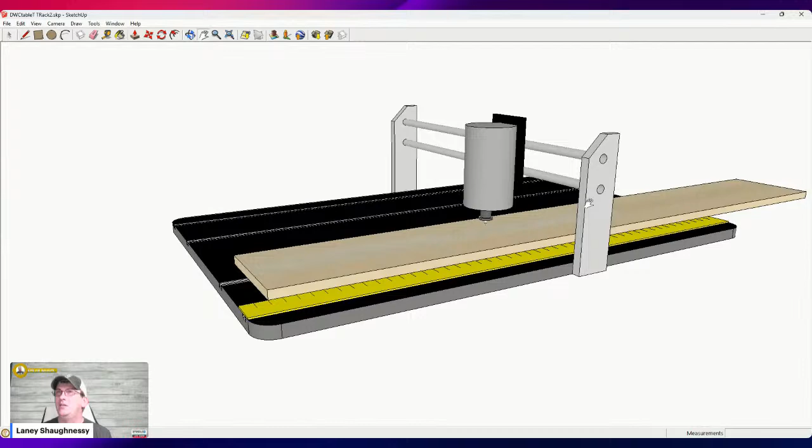Now, very roughly, I have mocked up a view of my Digital Woodcarver 2440 CNC machine, not the whole machine by any means, but just a drawing of it to talk about what I've got going on. One of the things that you'll see in the window here is this yellow, what looks to be a ruler, very roughly drawn, of course.

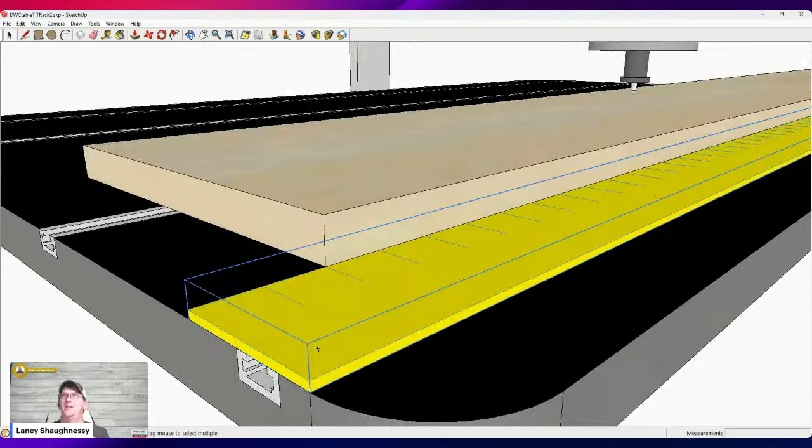But this is my favorite thing. I have no affiliation with Swanson or Johnson or any of those ruler companies. But I went down to Lowe's and purchased a 48-inch metal Swanson ruler, and now Lowe's carries Johnson. I don't think they carry Swanson anymore.

This ruler is the lifeblood of my tiling jobs. And let me just stop right for a second and acknowledge something here really quickly.

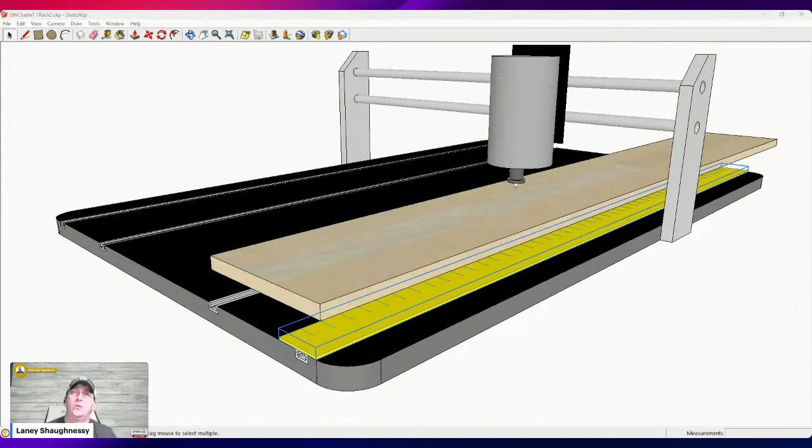And those holes are slightly larger than the 1/4-20 bolt that I use to secure it down, but everything slides right into the T-track. And what I end up doing is I'll put a pin in the router, and I will move that pin. Let me see if I can just kind of simulate this. I'm not going to try. Well, hold on a second. I can try. Let me zoom in. Let me see if I can pull this flat, because my pin is flat.

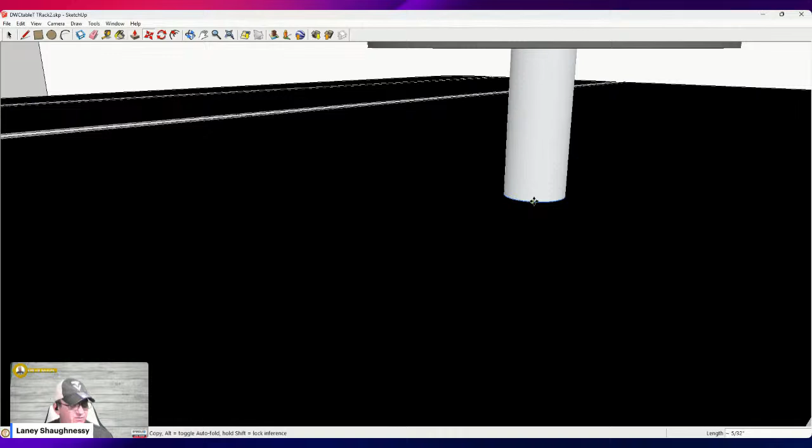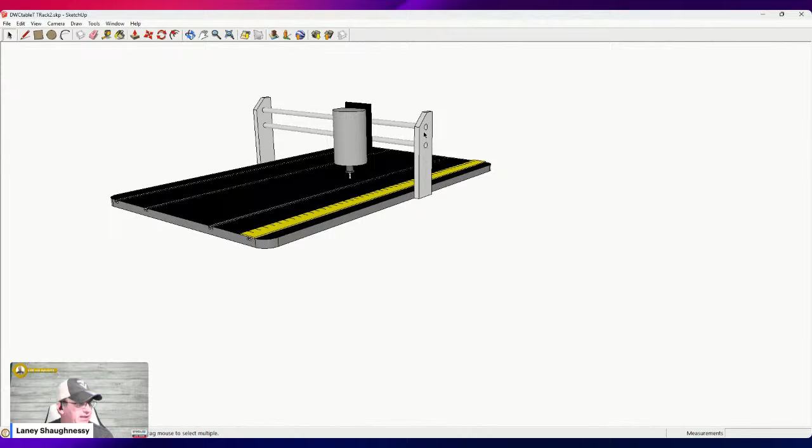And let's see. We'll just make it a little bit longer, so all of this makes sense. And what we'll do is, let me tilt out of the table here. There we go. I'm going to select this, and all of that. I'll hit G for group and create. Now I'm going to move this, and let's just move it right along here.

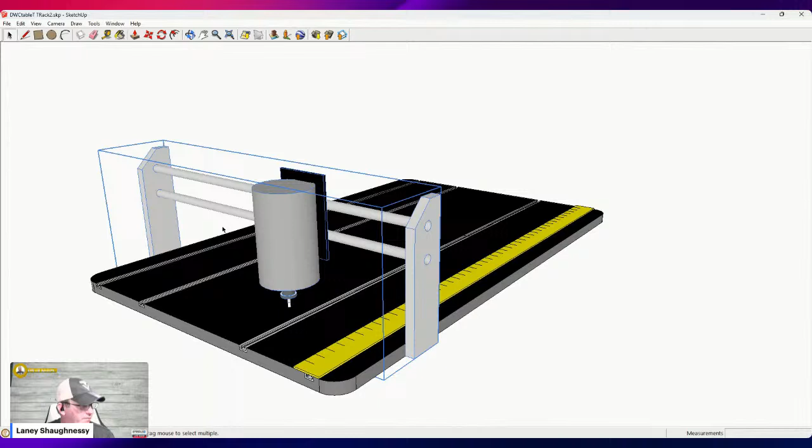And I want to try to simulate this, but I don't know if I can. Oops. Let me move this down. Oops. All right, now let me select this with it and move that over. Come on over. Kiss right there. Okay, so let me get out of that.

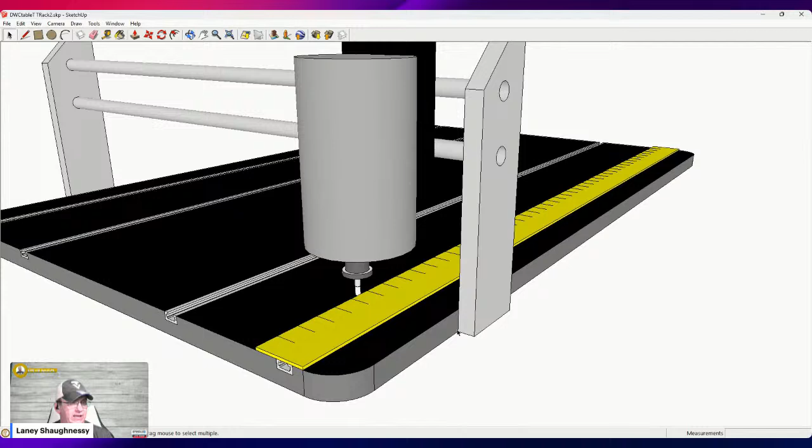So what I end up doing is the holes are slightly larger than the quarter 20 bolt that I'm using. I secure it at one end. I bring my straight pin down up against the edge, secure that end down, and then I will travel all the way down to the other end of the table, slide the ruler up against it, secure it down, and secure the middle bolt as well. And now I have a perfectly aligned fence, if you will, that's aligned with the travel of my CNC.

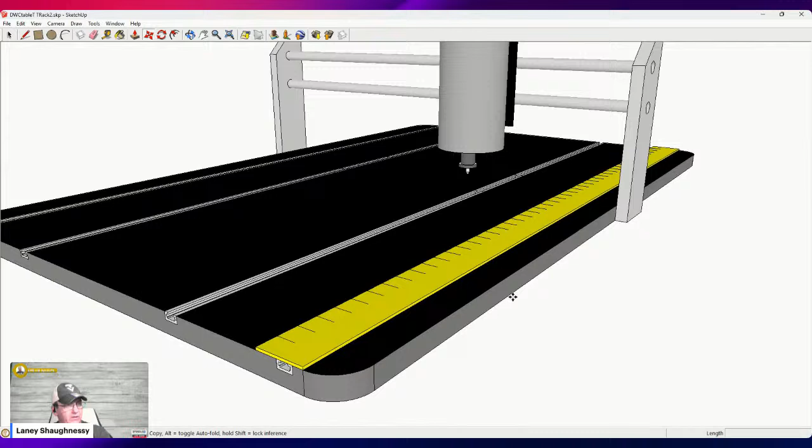And so it is, except for when I'm dragging it off the alignment, but it is aligned with the CNC, and it's ideal. So let me move this back up to here. Let me get back to this point. When I secure my material on the CNC, it's a 48-inch ruler. My table happens to be the 2440. The table is 48 inches long. So the ruler literally goes from end to end on the table. And I end up using the 2-inch mark. That's the mark that I reference the first edge of my board on.

And then on my CNC, I have a waste board that has different clamping options. So I can clamp from, let's call it the right side of the ruler, and of course the left side of the board. So I can clamp on both sides of the board to get clamping and secure all the way around.

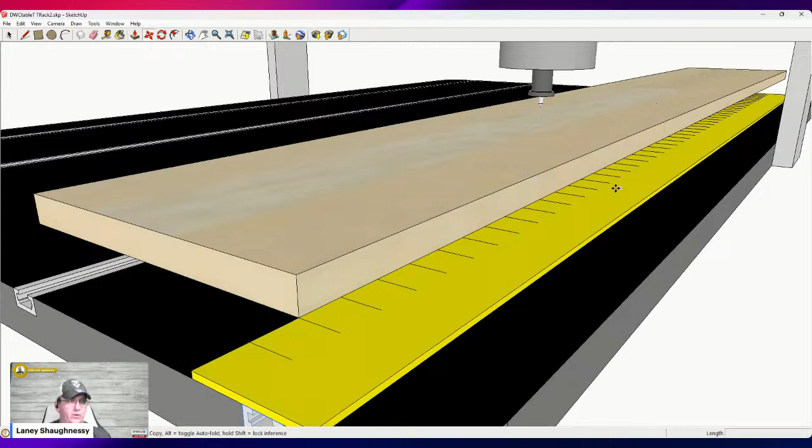And on the ruler itself, the end bolts that I have securing it down, if I need clamps for those, I have an all thread bolt with a nut on it that goes through into a nut in the T-track, right? Secures that down. And then I have a little bit of thread sticking up that I can put a small piece of wood that has a notch like a rabbet on the end of it that can hook on there, and a wing nut on top of that to secure it down, like another clamp on those 3 bolts there that are on that particular screw setup.

And so I have plenty of ways of making sure that both sides of the board are clamped evenly and everything. So that's going to be critical. So your clamping, your positioning, and things like that. Now, on my particular CNC, in this particular instance, my cutting area from the front of the machine back is 40 inches. That's my maximum travel. So from the front of the machine back 40 inches is the travel.

Now on my particular 2440, I have what's called the joint maker jig attachment, which shoves the gantry forward 3 inches, and it allows my router to come off the front of the table by 3 inches. And so by shifting the gantry forward that 3 inches, I lose that 3 inches on the back end, right? I'm moving that 40 inches out further.

So technically, in my situation on my machine, and it's all about knowing your machine, from the front of my table back 37 inches is the maximum travel I have, and then 3 inches on the front side, of course, makes 40, right? So I still have the 40 inches of travel. Nothing changes there, but I've shifted everything off the front so I can carve dovetails, finger joints, and things like that off the front of the table.

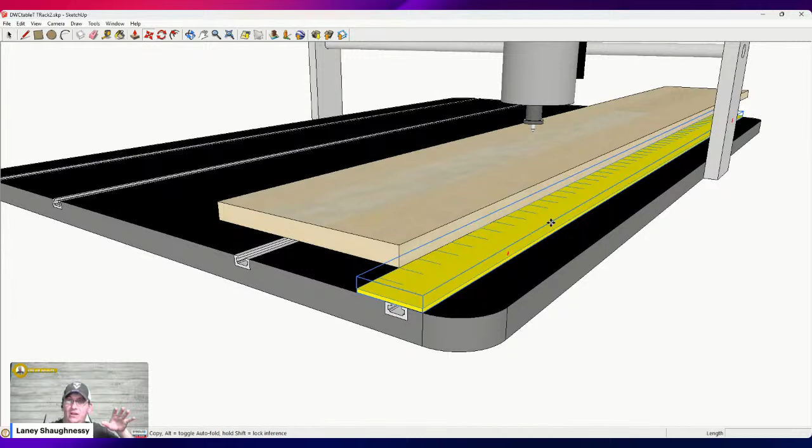So that's why, long-winded. That's why we're back here, and that's why we're not using the bigger machine. That's why we're using the 2440. And also it gives me a chance to make a video of the actual tile job, how to tile, showing the carving and all that stuff, which is going to be phenomenal for Digital Woodcarver customers to review, but also other people too. All right, so that's my setup and that's my pass through. Now let's jump over to the Vectric software and create the design, set up the tiles, and go from there.

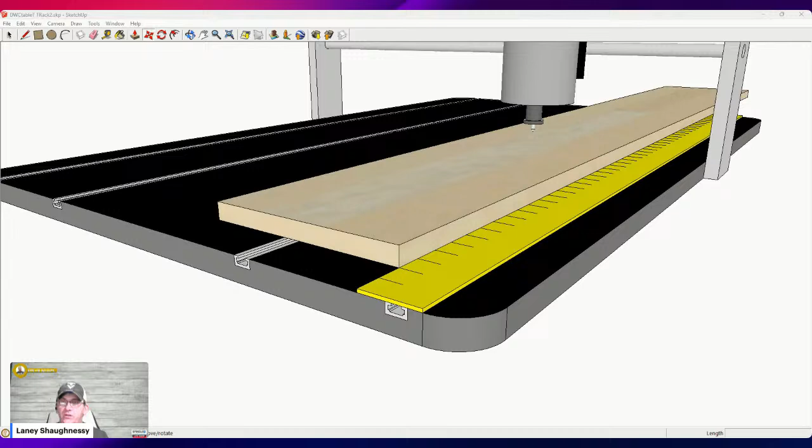One of the main reasons, Keith, and I know you, you are a dog guy, so I think you will appreciate this very much. Let me see where we are here. We're getting ready to switch over to Vectric, but before I do, let me share another screen with you all. Same screen, but now I can open up images. Let's see if I can get both of these to open up on this computer in different positions.

So, ladies and gentlemen, I'd like to introduce you to Lainey, spelled differently, Laynie. Lainey is a new member of the family, and we were getting acquainted with her yesterday, and it kind of took me away from class. She's got some husky in her. She's a bit of a mixed breed, big old girl. I'll know more about her genealogy in the upcoming weeks as I take her to my vet, and we'll do a little 23andMe for dogs, see what all she's made up of. Beautiful big old dog. Keith, I know you're a dog guy, so I'm sure you can understand. That's what took me away from class yesterday.

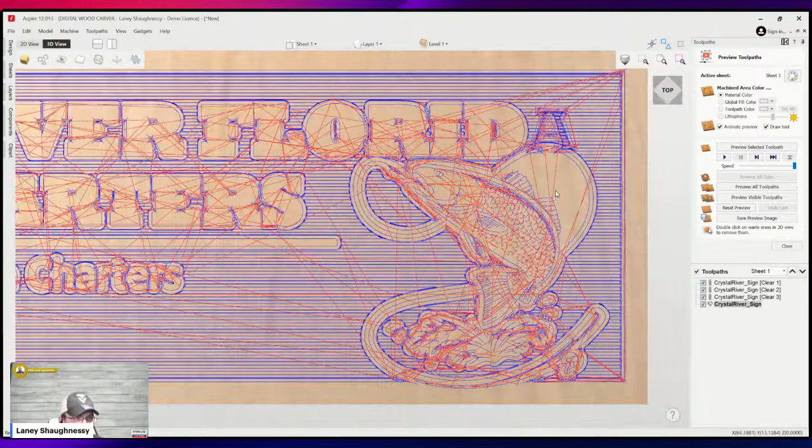So just in this visual, and I know it's hard to see with all the reds and blues, but number one, the overlap, the outside of the A is not really getting carved. You can see the difference between the A and the D because of that overlap. But also I can see all the wood right here is not getting milled away. That's got to go because the fishing line is just going to be a single line, and that's all going to be background. The background is 3/16 inch back. So we got to get a line in there, and then we'll have to fix up the border here.

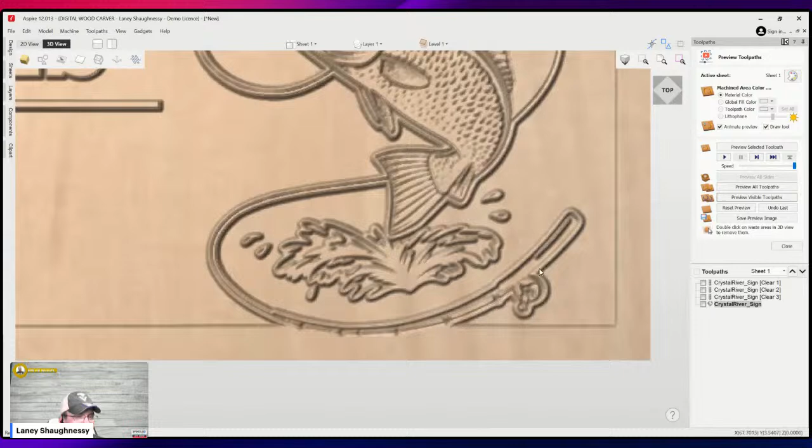Let's just preview it now, knowing that it's wrong, right? All right, so we know about the A. The A didn't carve, but first thing I can see is my resolution quality is really low.

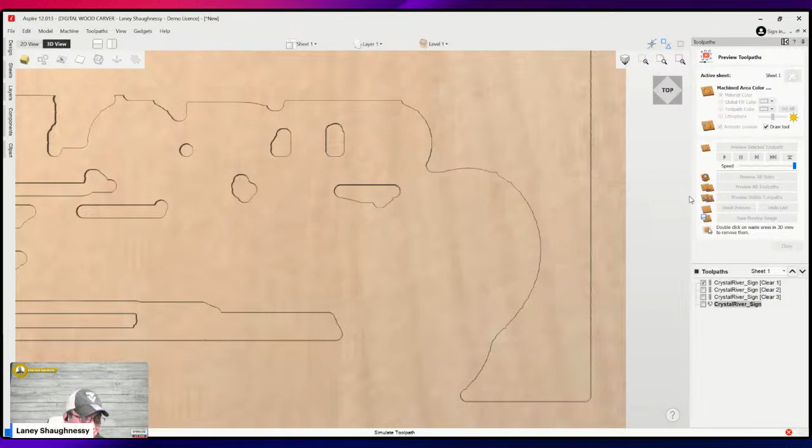So I'm going to go to my toolpath preview simulation quality, and I'm going to turn that up to maximum. We're going to preview that again. It was really pixelated. I couldn't see what was what. So we're going to be maximum resolution.

Love this new computer. No slowdowns.

Last week, man, I was so mad. The stream, I had the new... was it last week or the week before, ladies and gentlemen, that were following along with me? Just got the new computer set up, everything was going great, and then the stream canceled halfway through. Then in a private class, it did it again, and I thought, oh no. It's not that it cut out like it wasn't streaming, it was streaming, it was cruising along. So I thought, well, my relationship with StreamYard is about to be over, and it is.

It's over. Okay, so here's what I'm seeing. For the Fishing Charter Professional, that's all normal. That's exactly what I want.

It's going to be raised and stuff. I had talked to them about adding a texture in the background, like a chunky kind of texture using a ball nose bit, but it would have taken forever on this machine. I can't penalize them for that as far as billing, but it was going to take it a little bit out of range, and they're okay with no texture in the background. Because I told them, I could make the texture look like water where the fish is jumping out, with a little splash, or make it look like a windy day on the Gulf. I can really do it up nice. But they said, nah, we want the sign, but we don't want to spend too much on it.

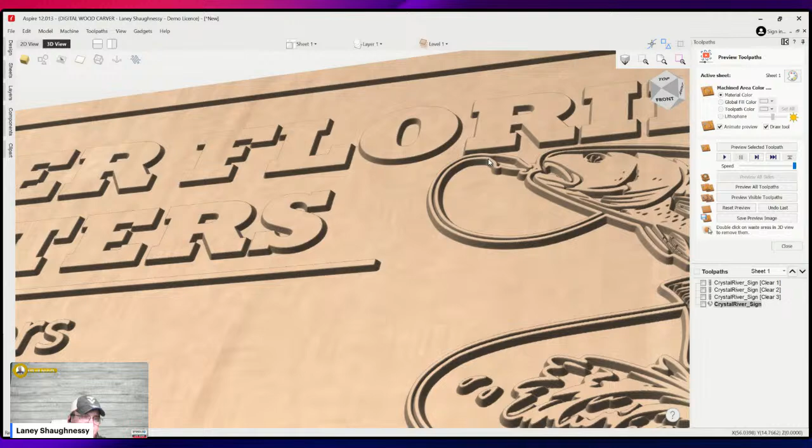I'm doing a raised design and I have to do this offset that creates kind of an island, right, that everything gets carved on. Since there's an island there, let me turn this on its side here - think of a platform. So this is a platform, and then the string, or the fishing line, is getting carved in that platform, right? Well, in this particular situation, since the line is... I kind of want the platform right here to be the line, is what I'm trying to say. I want the platform to be the line.

I don't want there to be a V carve in the middle of it, and I want the lure to be solid as well too. So all I have to do, from looking at this, is remove the vector in the middle that kind of represents the line and just have the offset that was created carve that line through.

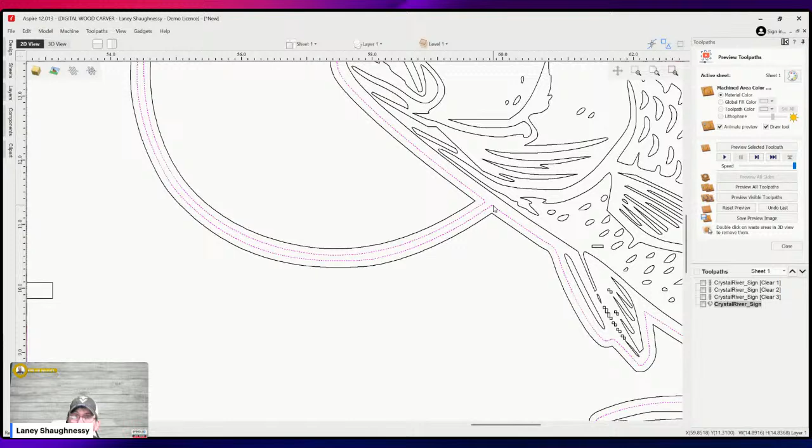So when we look at the 2D view, this vector right here in the middle doesn't need to be selected, but it is cut off here. So I need to connect this vector from here to here to close that off, and then close off kind of a line. And then I can not select that.

Same thing in here, this single line needs to, I just need to carve around in here and in here. The reason why this looks like a single line instead of a double line is because that's the double line, that's the other line. I'm missing that inside line on the around the fin, and that's why it's solid here and not milled away.

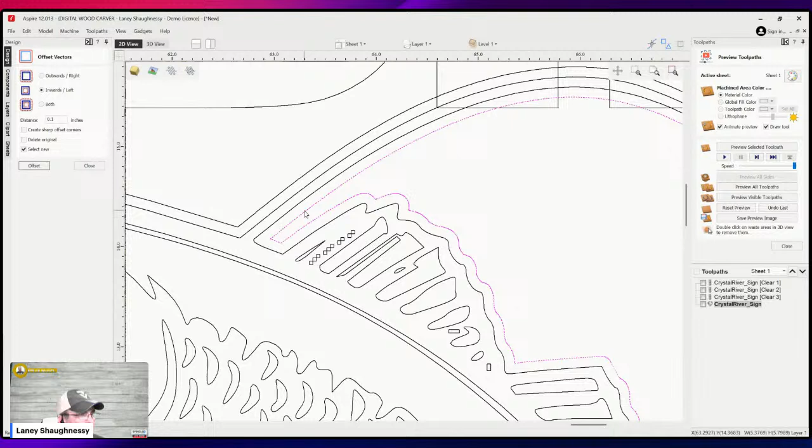And then when I'm carving it all, we're going to be selecting this and this. That's going to, this whole big white area, that's going to represent the line. These two lines are going to go away. So at the fish right here, it needs to connect there as well, and that line needs to be kind of a separate thing.

Let me just verify that two lines go all the way around. Two lines. And then I need to cut it off right here. This rod is going to stay like it is. So here, kind of where the rod ends and the line starts, I'll end up connecting this and I'll have a separation. All right, so let's do that so it makes sense of what I'm saying.

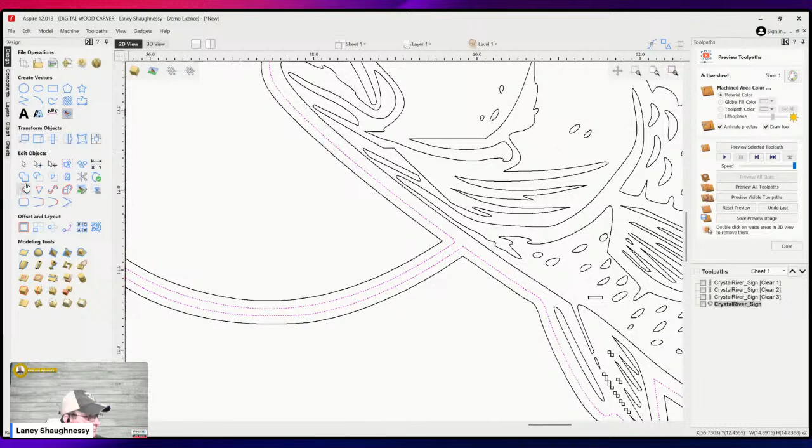So in node editing, we're going to go to node editing. And here, I'm going to cut the vector here and here. I'm going to go ahead and delete this span that's right here, and delete that span right there.

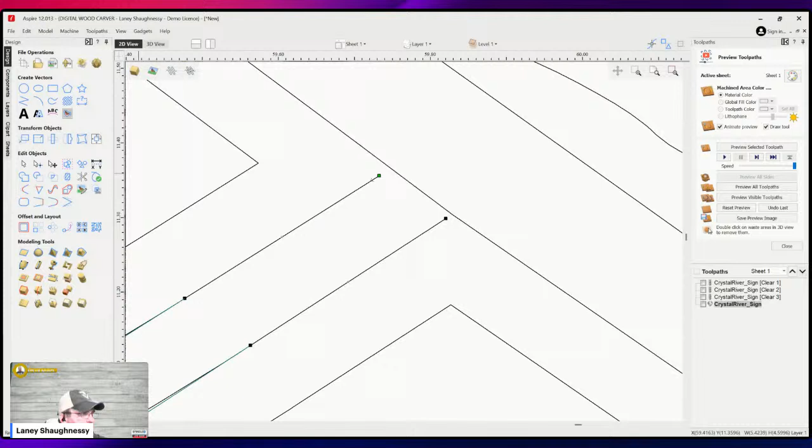And on this node, I'm going to kind of pull it back a little bit, not much, just a little. I'll pull this up a little. All right, these two points are going to connect with a straight line. So join with a straight line to close that back off. And then I'm going to do the same thing here, join with a straight line to close that off.

Now, I want to kind of somewhat create that. It's going to be insignificant in everything, but I don't want too big of a gap. All right, so now here when I'm carving this, I won't delete it right now, but we're not going to have that selected. So that's going to be turned off.

Okay, now we're going to come up here. Same thing, node editing. We're going to come here, and I'll do it back here because I'm going to end up just getting rid of this curve. But let's go right about here. Cut the vector there. And on this kind of, let's call it a corner, cut the vector.

I'm going to delete this span right here, and I'm going to delete this span and this span.

Okay, now these two vectors, it is technically kind of a little bit of a curve. It doesn't, versus a straight line, but it's such a small area I could almost join with a straight line. But this vector and this vector here, these two are going to join with a straight line. And then let me actually pull this up just a little bit. And then these two will join in a straight line.

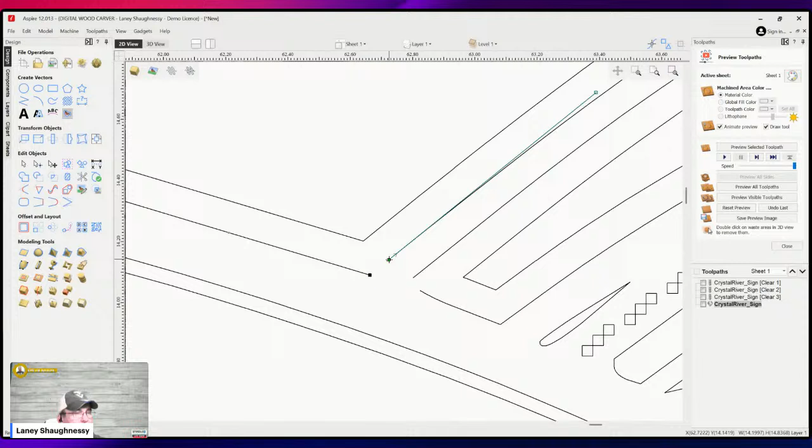Now, notice when I select this, if I try to include this in it, let's say, and select this, if I hit join with a straight line, all it's going to do is try to find—I don't know this for sure, but it finds the closest point of intersection.

And so for me, that's good. I would say that if I rotated this 90 degrees, this is actually the shorter point, so finding that point from there to there is perfect for me. I'm happy with that. I don't know what makes the algorithm do that, why it chose to close off here versus this way, but I'm glad it did because that's what I want it to do. So when I hit join with a straight line, in this case, it's not going to be straight.

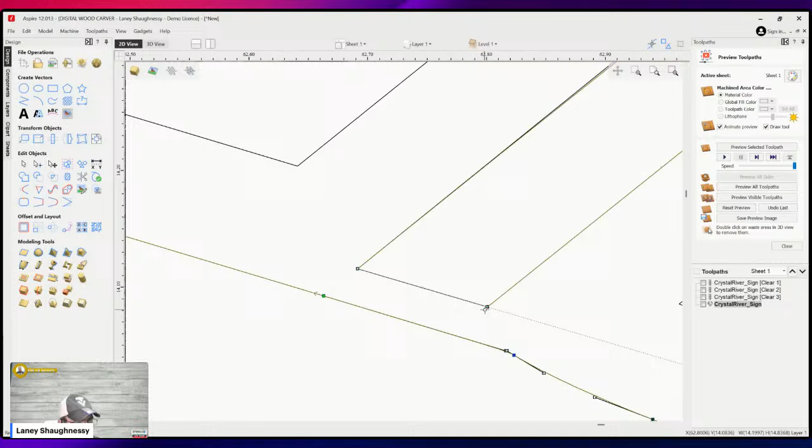I'm going to do a smooth curve. That's going to kind of connect that together with a little bit of a curve there. Now on this, I want the line to somewhat follow the curve, so I'm going to take this guy and kind of bring him down, to kind of create almost a consistent width, if you will.

Now I got to go all the way over to the end of the rainbow here to this side. Same scenario, cut the vector. Now, by the way, the whole point I was making about the short distances - if I would have said join with a straight line, it would have connected the two obvious points that were coming down, and not the ones that it did, which again was good for me. Join would not have been the option I would have chose. I would have simply just drawn a line from point A to point B to connect them together. That was the ending of that whole point.

Okay, so in node editing, I believe I cut that vector already. Let me see if I did. I did, yep. So I'm going to pull this back and pull that back. Now, join with a straight line. Oops, that was a smooth curve, sorry. Join with a straight line.

And then I'm going to take this and join with a smooth curve, and I'm going to fix the curve a little bit, so it doesn't need to be so dramatic on the curve. Just a nice flow there, and somewhat decent space there. So I'm kind of good with that. It's so insignificant.

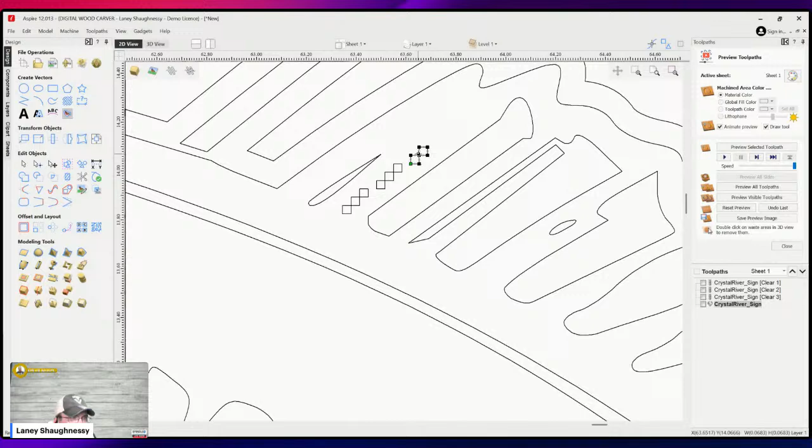These figure eights, by the way, this is trash. This is the noise filter. So had I turned the noise filter up a little bit, these figure eights would not be here. These are the problem children - when the software says you've got some overlaps and intersections, that's this. So this is pixels, overlapping pixels, trash. And if you have a square pixel, in my opinion 99.5% of the time it's trash also. Your design has contour and shape and curves to it, and if we're coming through here right in the middle of these nice contours and curves and we have this square pixel, that's trash.

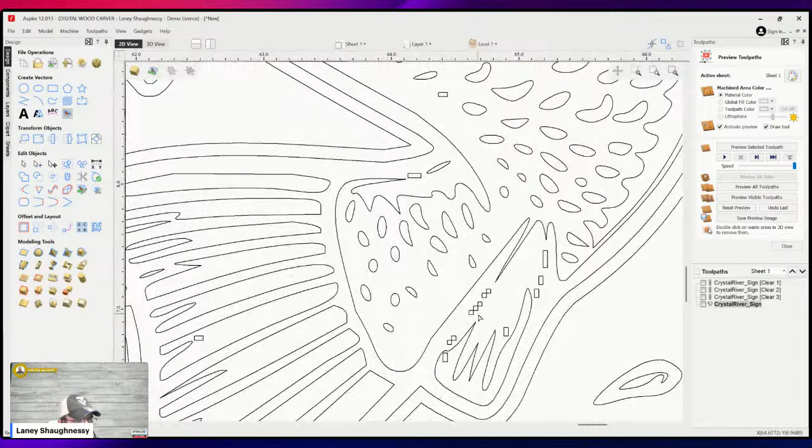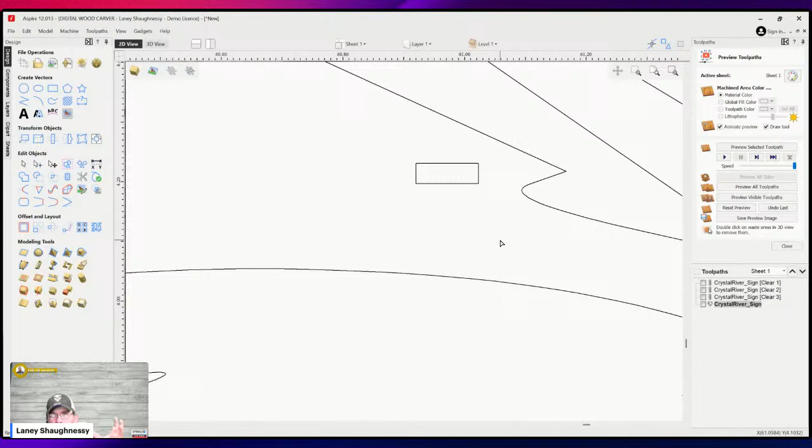Get rid of it - my opinion, that's what I would recommend. So here, figure eights, I call them figure eights, but gone. All these square pixels, gone. So come here, figure eight and square pixel, gone. That kind of thing, the square pixel right there, that's trash. Now, had I turned my noise filter up when I traced the image, it would have ignored all of that. See, odd man out - I got this water splash, and all of a sudden there's just a square pixel right in the middle of it, it's trash. Get rid of it.

But had I turned my noise filter up, it would have ignored most of that. So we're going to get rid of this and these figure eights here. Okay, all right, I am good with that. Everything looks shapely. Okay, so I've isolated this.

Oh, let me get out of node edit mode. I've isolated that vector, I've isolated that vector. They're not going to be selected in my next toolpath simulation here. All right, so done and done. Now I need this one right here.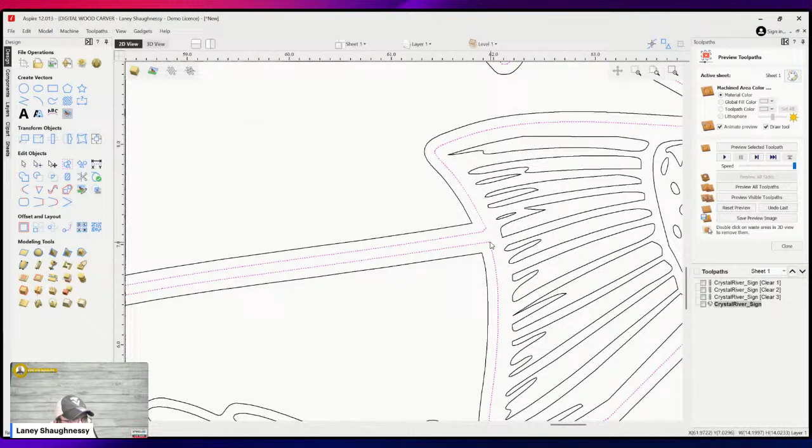So come over here to the tail, rinse and repeat, node editing, cut the vector. I'm going to come back here and cut the vector here. Actually, I'm going to back up a little bit right there and cut the vector. I'm going to delete this span there and there.

I'm going to delete that span. Okay. Join with a straight line to close that off. I'm going to actually pull this one back just a little bit. And then join with, and again, it could be a straight line, it's such a short area, but I'll just do a smooth curve. Join with a smooth curve. So it'll just create kind of an organic curve a little bit there.

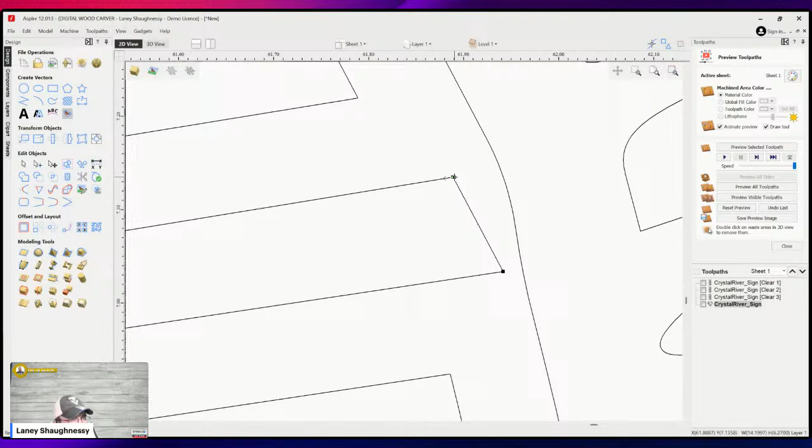Okay, on that tail. All right, again, don't want a big gap right here. Let me pull this out, try to stay consistent with my thought process and everything. All right, now, right here, I just want that fishing line to stop here. Kind of at the end of this pole, let's call that the end of the pole right there.

The line again, for me, is gonna be this wide area right here, that island and everything, because it's such a big sign. That's what I want. It's what I want, right? So it should be what the customer wants, but I think this will look better. I could be wrong. All right, let's cut the vector there, and let's cut it here.

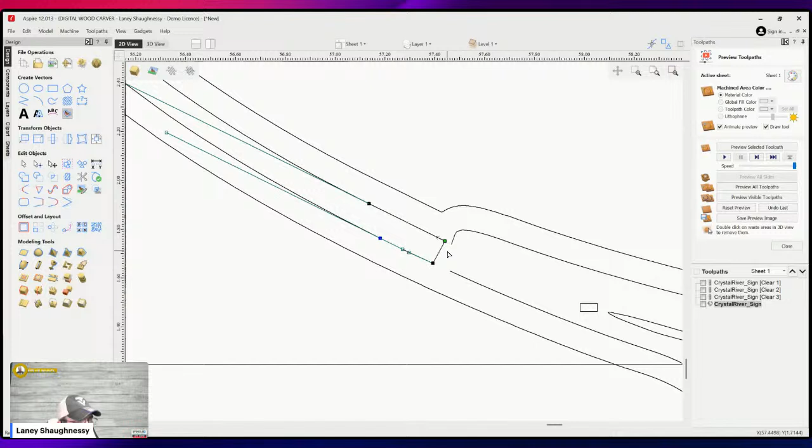Okay, now I'm going to pull this back just a little bit right here and here. I'm going to join that with a straight line, and then I'm also going to join this with a smooth curve. Okay, close that off. There's another stray pixel hiding right there. Delete, and there's one. These three, that's kind of representing the, it's like a little shadow on the pole.

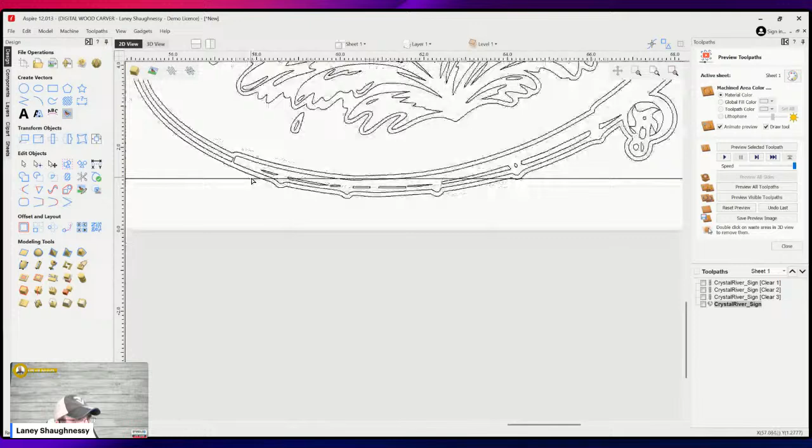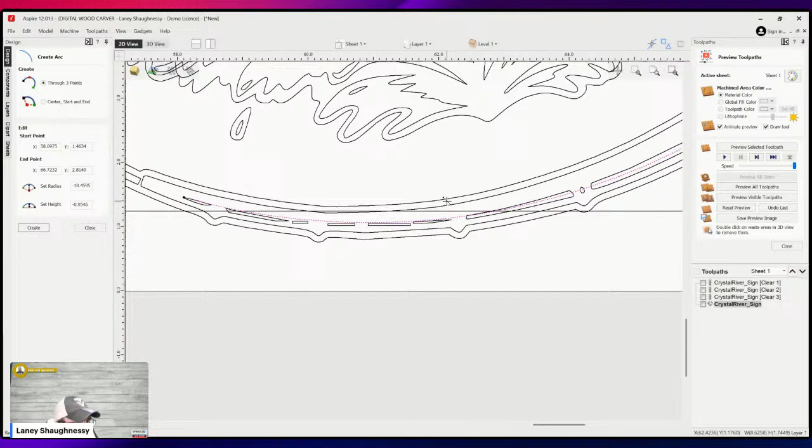I am going to, let me see what that looks like in the carve here. Okay, I'm going to redraw that really quickly. So what am I going to use? Let's go with an arc tool, draw an arc. I'll pick right here, point A. I'll pick up here, point B. And let's pull that arc somewhere right about here. It's not really an arc. It's more of a Bezier curve.

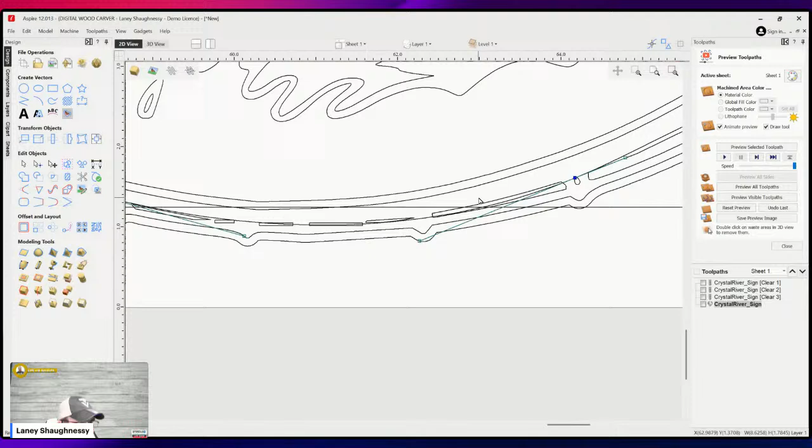So let's go to node editing and let's make that a Bezier curve. Okay, so I'm going to insert a point right here, and let's pull this down. Pull that down to there. I'm going to pull this down to here.

Okay, now I'm going to hold down the control key, and I'm going to drag a copy of this up to here. Go back into node editing on this, and I'm going to insert a point right here and kind of pull that up to there. Get that to flow kind of like that.

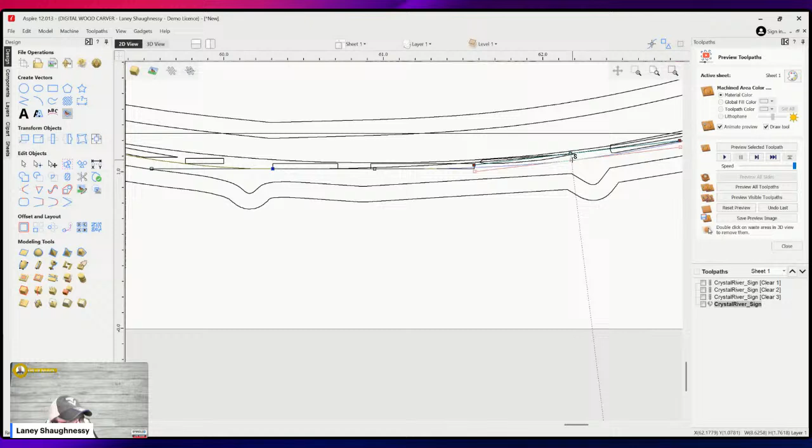It's hard to see with all those other vectors behind it and everything. Don't worry, it'll make sense in 2 minutes. Insert a point here so I can pull this up. Pull this up to here, and then pull that up to there.

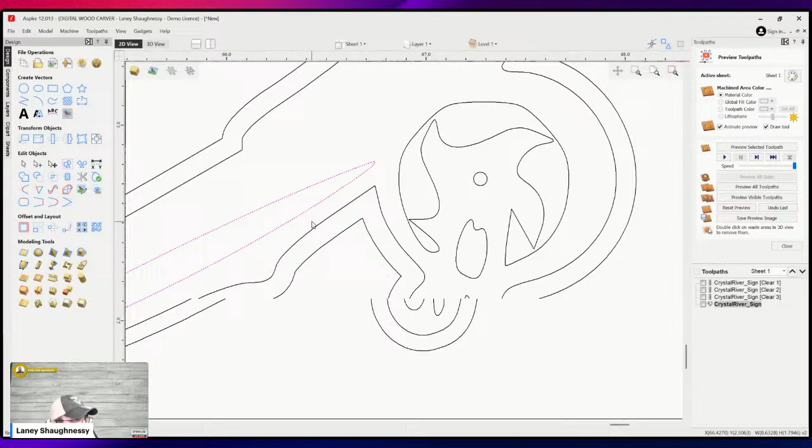All right, now I'm going to get out of node editing mode, and I'm going to get rid of all the vectors in between those two lines. Select and delete. Select and delete. Select and delete. And then I'm going to join with a smooth curve on this end and that end. And that's going to kind of replace that, so it'll be kind of a solid instead of those little ones in there. That, again, it is what it is.

All right. So now, again, need to get the A done. And so now I can come in and I can kind of connect things together. So trim with the scissors. First of all, yep, convert to curves. Okay. Trim with the scissors. Line's going to come in, connects here. Let me just

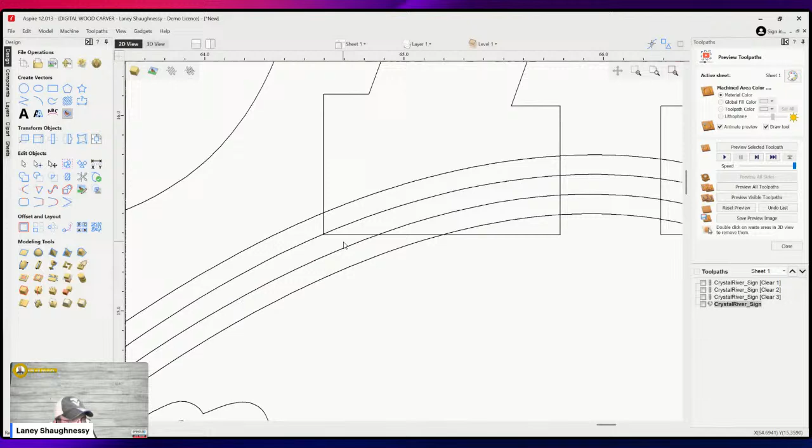This line is not going to be part of the drawing. I don't want to delete it. I want you to kind of see with and without. But I want it to be clear in here what I'm trimming and stuff. So I'm going to move this out of the way. I will put it back in just a minute, but I want you to see what's happening here.

So with the scissors, we are basically going to connect this here. The line is kind of going behind the A, if you will. And then here, we're going to have it go in front of there.

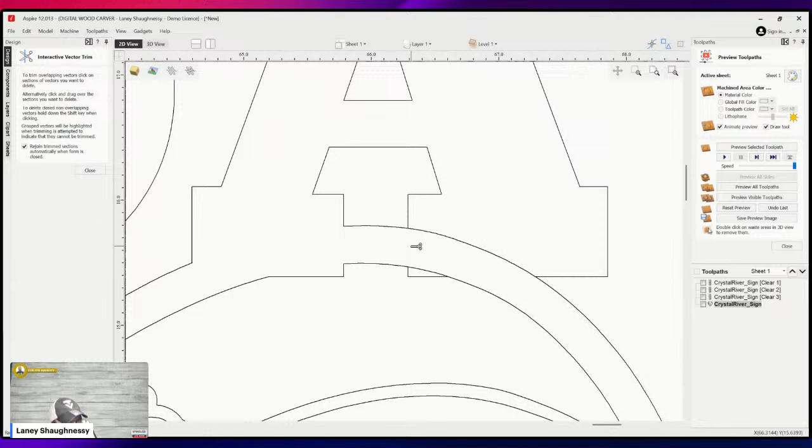And in order for that to happen, I need, it's not gonna, yeah, it's gonna go behind. Let me see here. Hold on a second. I need another vector.

A is going to get raised. The line is going to get raised. Yeah, we'll have it where it looks like it goes behind for now. I'll let them make the decision what they want. If they want it to look like it's going in front of the A, then all I have to do is create an offset and trim it so that it looks like the line is in front of the A.

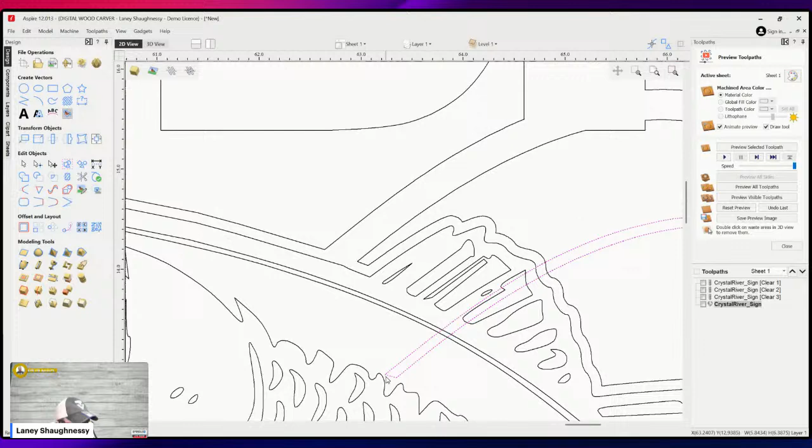We'll just do it like that for right now. All right, let's put this back. Okay. Now, again, this vector is not getting used, but I don't want to take it out because I want to kind of show you what that was versus what it's going to be now. All right, let's go ahead and go back and select everything. Again, I have not done any trimming on the pole and the border down here. I haven't done any of that.

Let's go back into the toolpath here. Calculate that. Still says I have overlap lines. That's because of the fishing pole and the border at the bottom. I'm going to continue anyway. I know this. I know that. All right. We can see our A is back, right? So let's reset the preview. Preview the visible. Oh, wait.

Hold on. No. Got to deselect. All that trimming that I just did, I got to deselect that, and that. There we go. Now let's calculate. Okay. Now let's calculate.

I got to sit up taller in my chair. That way I'm not hiding behind my name where it says Laney Shaughnessy, it was cutting my head off.

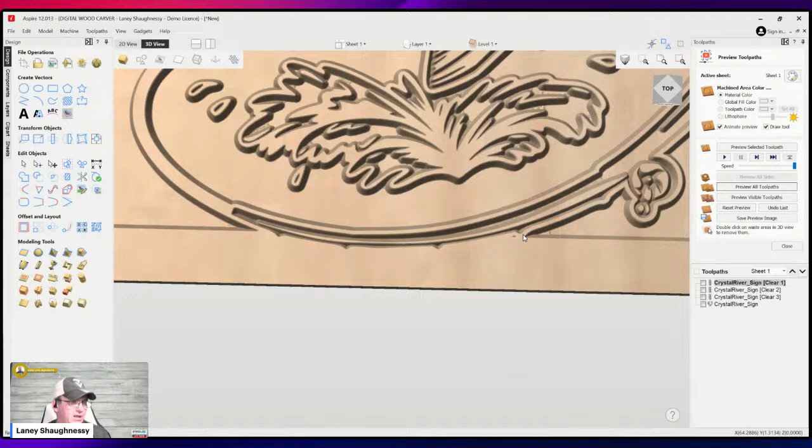Let's get this on here. All right, so on here, I need a little bit of definition for the pole where it goes into the border there. Got to fix that. And let's probably put a little detail in the lure, right?

And you know, the black line, that little thin line in the middle was kind of defining the thin line and all, but I want the fishing line to be here. The only thing that throws it off from what I can see is the width of the offset, which I can fix very easily. The offset is too fat. You know what I mean? And so it's making that line that's going through look real bulky.

Simple enough to do a smaller offset to create that thinner line in there. But maybe a little detail in the lure, you know, little fish detail, a little eyeball or whatever would probably look better. I think they'll call me out on that. I think they'll say, yeah, let's do a little detail in there.

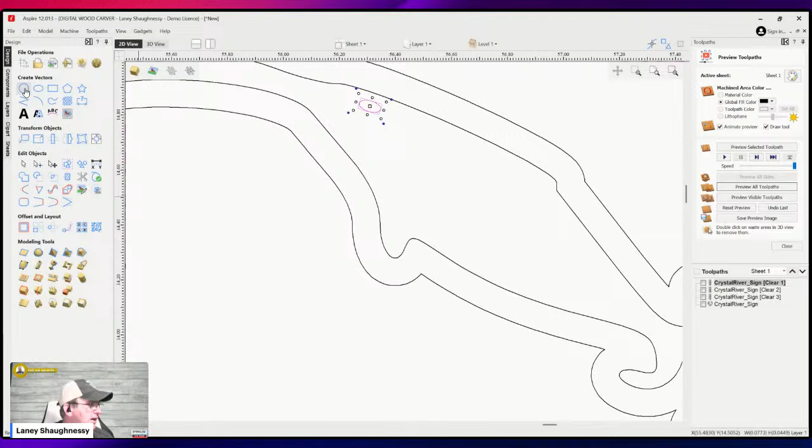All right, so on the fish, I'm not the greatest drawer in the world, but somewhere in this vicinity, I'll just kind of use this. Rotate. Let's go to node editing. Close this tool. Node editing.

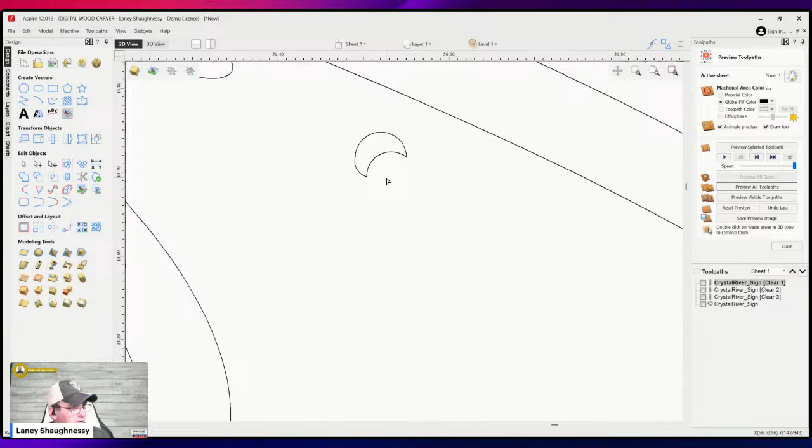All right, now I'm going to draw a line. I'm going to just kind of freehand this. Okay. I'm going to copy the vector, that little shape, along the lines.

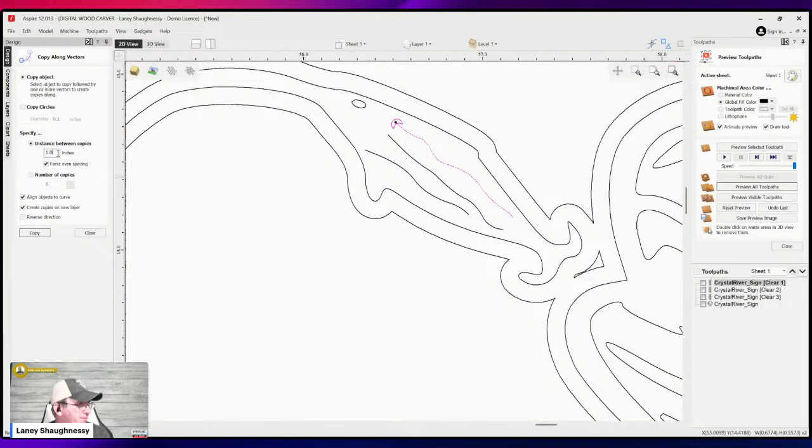Let's see here. Let's get it to go a little bit bigger on the spacing, 0.06.

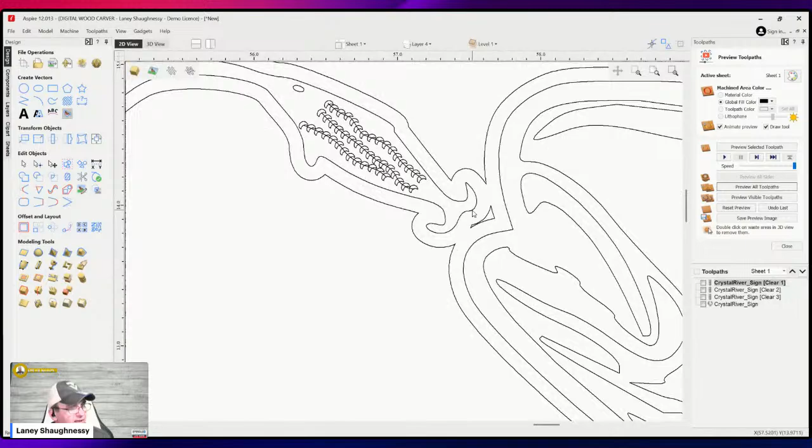Probably could have drawn my lines better, but let's see what that looks like. I'm not the greatest at that. I could have went the other way with my little scales. They went the other way. They're backwards. My fish has got scales facing the wrong way.

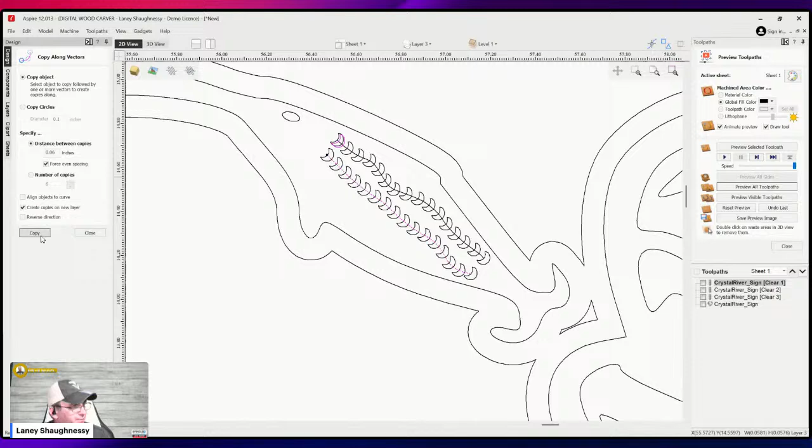I'm just going to go 2 rows instead of 3, but let me rotate this bad boy around. Okay, let's do that one more time. Select the object, hold down the shift key, select that, copy along. We're going to not align to the curve. We'll go 0.06. There we go. Turn that object off, turn this object on, copy. And then we can delete that one, the original.

All right, so we'll leave that kind of like that. We'll see what that does. I think it should flow the body. It doesn't flow with the body very well. I should probably pay attention to what it's doing, but it should flow more of a curve up and down. So anyway, we'll play with that.

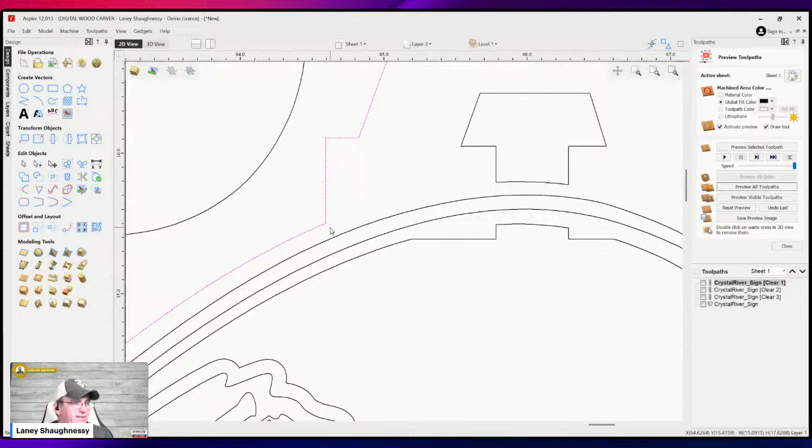But now the most important thing is on here, this line that goes all the way around. This is the offset, right? My A is connected to it, right? So I need to node edit, and I need to cut the vector right here on the A. And here on this offset coming inward, my A is connected to it as well. So I need to cut the vector here on that A and here. Okay.

Because those lines are about to get deleted. So I'm going to get rid of that, and I'm going to get rid of this, and I got this right here. I need to cut the vector. Zoom in. Oops. Cutting the vector is separating that, so I can come in here and delete this offset. This is the offset I created. That's the 0.1 offset all the way around, right? And it made everything just too big.

Okay, so going right back to here. Now, the big difference is, let me get rid of this one too. All right, so this is kind of the original. This is the string line and all. And the thing of it is, hey, I want a thin line. Why not use the original line here, right? I've already cut it from here. So really, all I need is just the offset around the fish, so it carves proper. I need that extra offset around the fish.

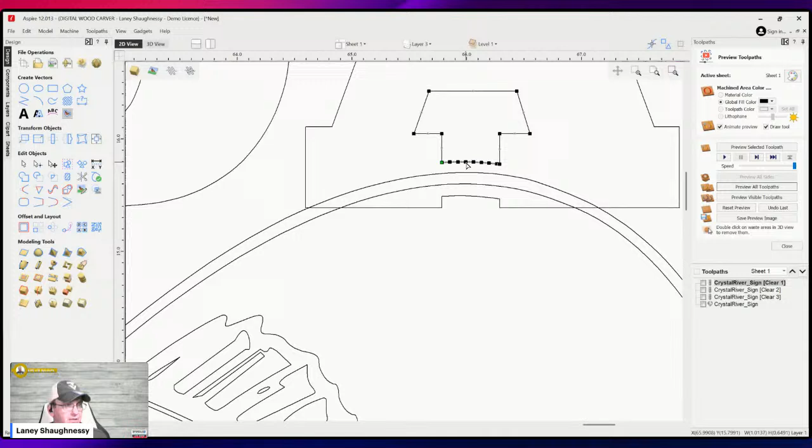Now right here, node editing, I need to cut the vector here and here, on this corner and on this corner. Get rid of these two Humpty Dumps, those curves. That was the offsets from before. Don't want that. So again, I'm going to use the extend tool to extend this line to here, and the extend tool to extend this line to here.

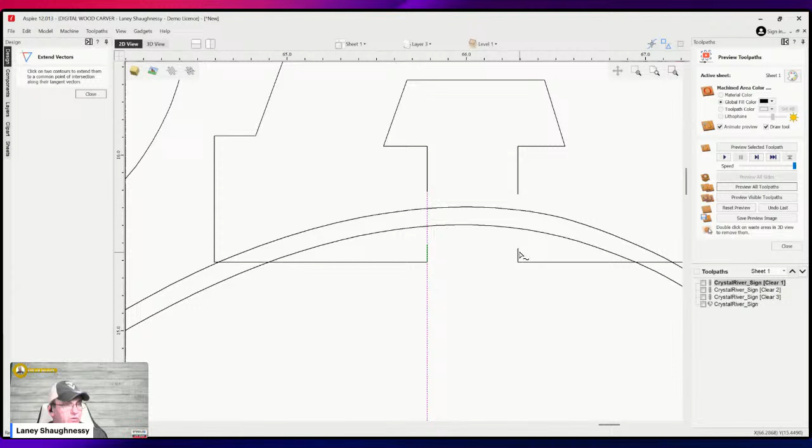But I can't really extend right now, because if we zoomed in really close, there is a little bitty notch on this line, unless that's a glitch in my eyes. Looks like there's a little notch right there, but there's not. There's no notch there.

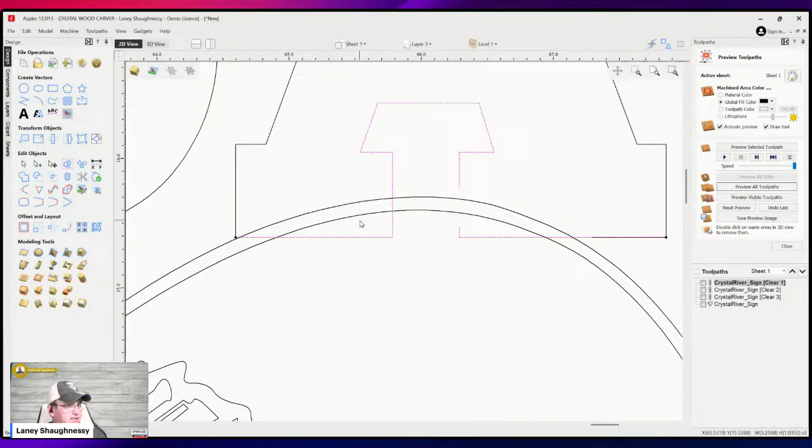Okay, those lines are not joining together. So what I'm going to do is select this, join with a straight line, select this, join with a straight line. Okay, so got the A back. So all I need to do is select this, offset it. I'm still going to need to create the offset in here. Or actually, no, I won't. Let me stop talking on my butt. Offset outward, and we're going to go just a small amount.

Perfect. Okay, now hang with me for a second. That offset is necessary so that my scales and everything on the fish carve proper. Without it, let me show you what happens. So if I selected all of this and I turn off that offset and I calculate this toolpath, let me just do this. Turn off that offset on the fish.

If I calculate this toolpath, again, we're overlapping the border down below. That's where my problems are. And I still have 4 open vectors. I got to close those. Let me hit cancel real quick. Select all open vectors. It's just the A. I need to go into the join tool and join them up.

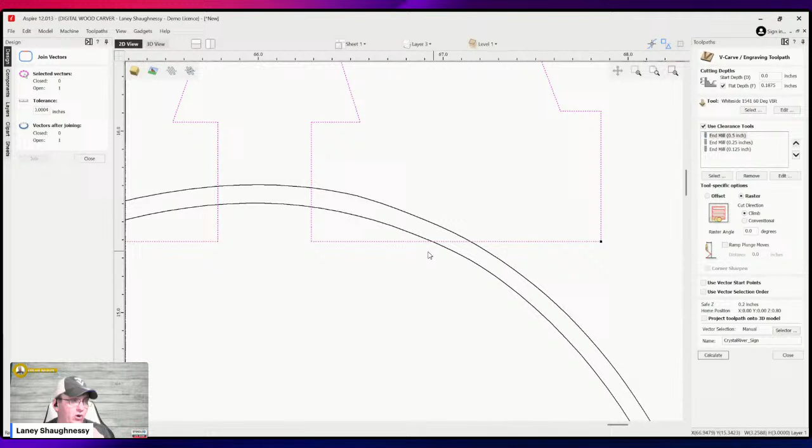Okay. When I have a vector that says it's open, right? I got one open vector. It's not closed, even though it looks closed. The quickest and simplest way to find that, there's an overlap in this situation, right? That's what the problem is. It's an overlap. The quickest and simplest way to find the overlap is it's always going to be near the

green start point. So go to node editing, find the green node, zoom in, and you'll see that the line right here, if I move this off the green node, that's that overlap, right? And so technically the overlap is actually this line right here. So that's my green node. My green node, the start point and the end point, they didn't line up together. So all I'm going to do is pull this back here and line that up with that. And then let's go back here, go to the join tool, and it should be closed, right?

Okay. So the green node always represents the start point. The black node after it, all the way around, represents the end point. If we have one open vector, that means that the start point and the end point are either gapped or they're overlapped or something along there. It's at the green node. So always look for your green node in node editing, and you'll be able to find your issues quickly.

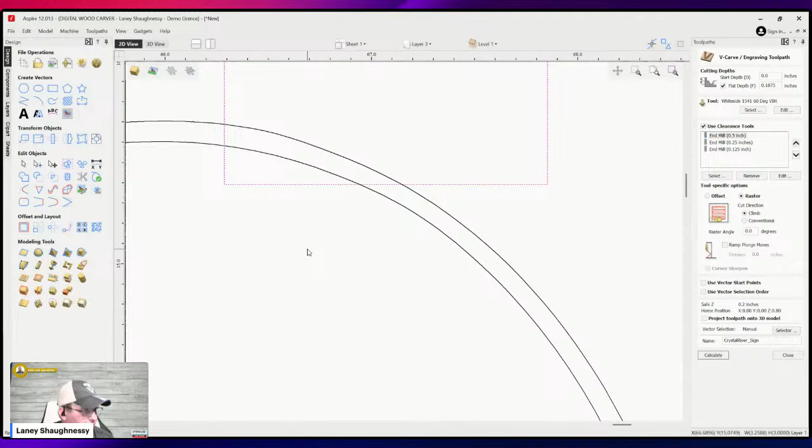Okay, so A is cleaned up. Let me show you. Let's go back to what I was doing really quickly. Turn this off, this offset. And let me show you what that would look like without that offset around it, right? So there's still 2 open vectors. That's the 2 where the scales are, the 2 lines in the little fish right there. They're being ignored. But watch this.

When I reset this and preview this, the fish is going to be reversed from what it should be. It's going to be inverted: everything that was once carved down is going to be raised up, and everything that's raised up is going to be carved down because that offset is not there, right? So as we go through and preview this, the fish here is reversed. The scales are raised up, and the body and gill and all that stuff is carved down when it should be the other way.

And my little detail in the little lure there doesn't look too bad, but it's not too great either. I'll spend some time on that one. But that fish there is inverted, right? So everything else looks great. The single line, perfect choice, all that stuff looks wonderful, much thinner, better looking, improved, but the fish is backwards. So I need that extra line, that offset. Let's go back in. Now, in order to use the offset, my little fishing line has to be on the outside. They can't cross each other, right?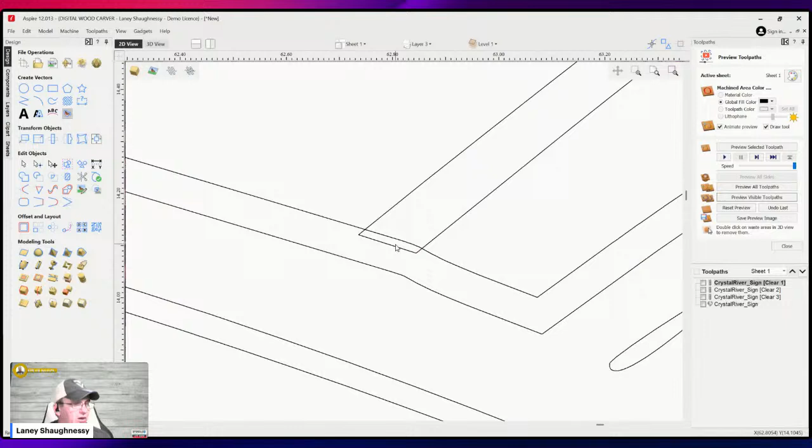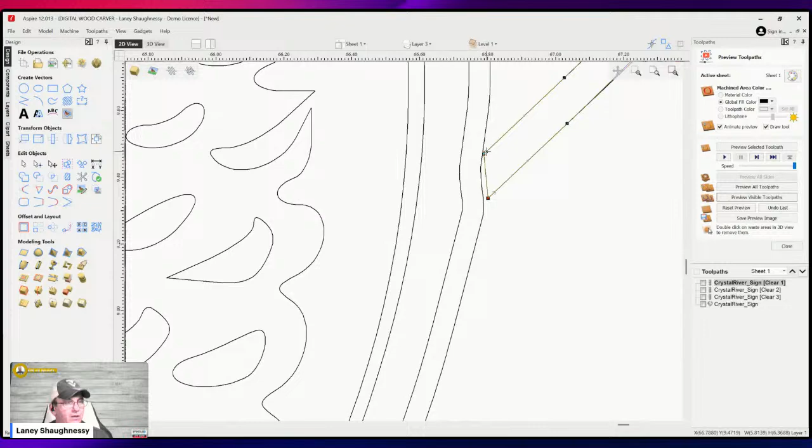So here's a quick and easy way that I could fix that. Number one is I could go select this, go into node editing mode, right? Grab the two nodes and just pull them ever so slightly past the line. Quick and easy. Do that in all the locations. Just get them to where they're not interfering with that body.

Now, the other way I could do this is I could have taken that offset that I created and simply created another offset, and with the scissors I can come in, get rid of all of that and that, and do it that way as well, right? So it's easier node editing than trying to trim and create that offset and everything.

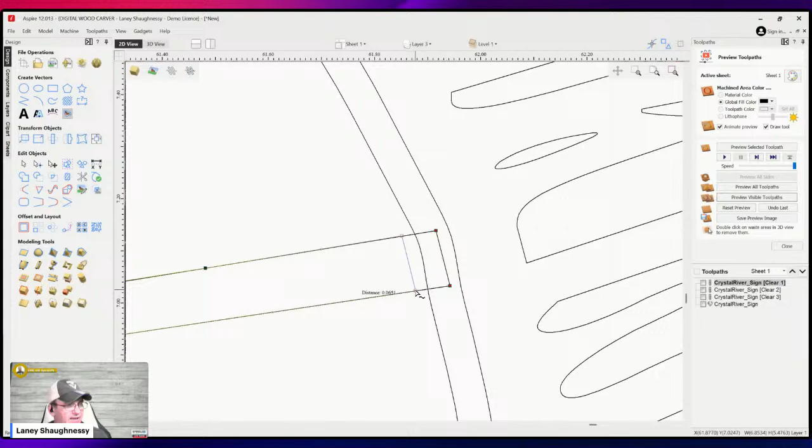So the quick and simple way is go to node editing, select the two nodes, and just kind of drag them back like that. Here, node editing, just drag them back just so they're not overlapping that offset. They got to be away from that offset. That can go away. Okay, so no overlap, no overlap, no overlap. That's good. Again, my fish, it'll be fine for now.

Now let's deal with the fishing rod here. Okay, the fishing rod is fine for the most part, it's carving in here and everything, but there's no real definition on the pole here that there's something there. So here's how I'm going to deal with this.

I'm going to come in here and this vector here is going to be the boundary, but I'm going to offset it first. So I'm going to offset outward a super small amount, literally like 10 or 20 thousandths of an inch. Offset outward, 20 thousandths of an inch. That's going to be my trim boundary.

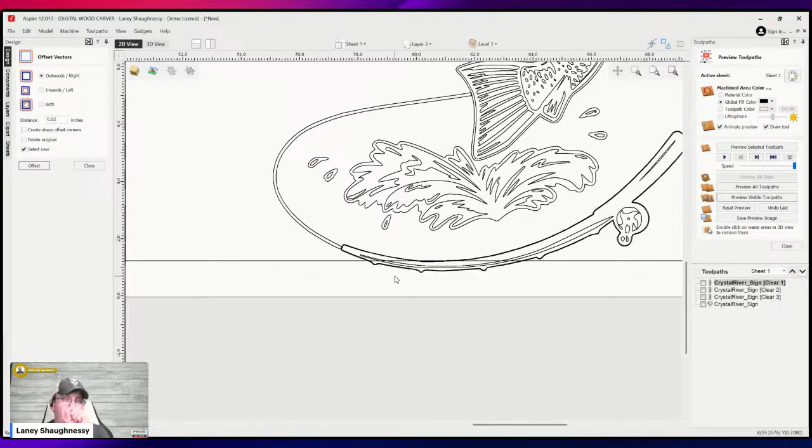Now I'm going to select this vector here, and just so you know, I could use the trim tool right here, and I could tell it to clear everything in the boundary. Like if I selected that border and that boundary and said clear everything inside the boundary, it would redraw that boundary, but it's going to redraw it around the pole kind of backwards. It redrew it not the way that I wanted to draw it. I just wanted to redraw it right here.

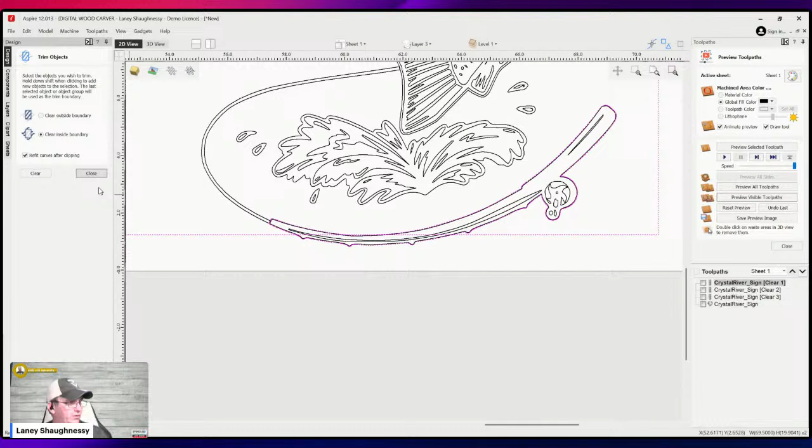So instead of using the trim tool, we're simply going to take our scissors. We made this new offset. We're going to trim it here. Trim the straight line away so now that line is connected going around. Get rid of the straight line going all the way across.

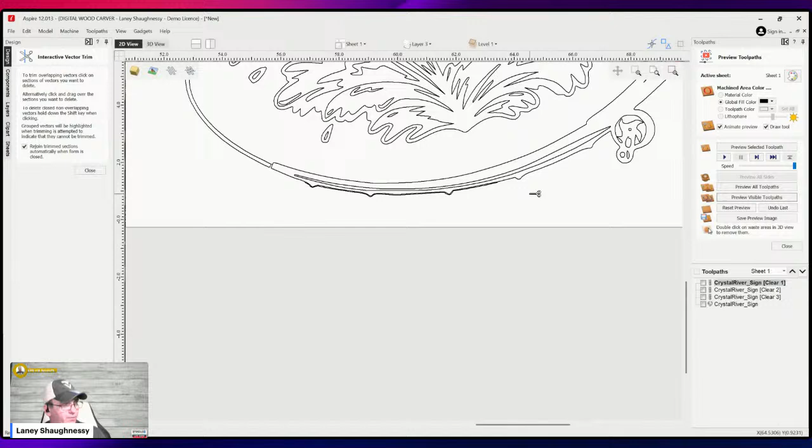Straight line, get rid of that. Oh, not that one. Don't get rid of that one on that end. All right, now here, oh, don't get rid of that. Zoom in right there. So now my border travels around and back up here. Okay. So now with that, I should be able to calculate this toolpath. Again, the scales on my little fish are not the greatest, but you get the idea.

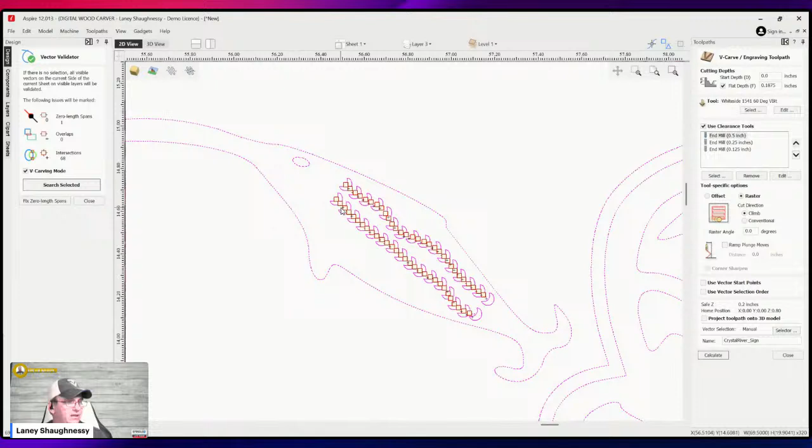Now, it still says I have overlaps and intersections. This time I'm going to go to the vector validator. And I want to see where those are. And they're on my A, right? That's the majority of them. And then I have those 2 lines I need to delete. So simple enough. Those lines that represented what my scales copied along don't need to be in there. That needs to be better. We know that. But I got to finish. I got to trim my A.

Okay. Now, we're simply going to just do what we had before. So the A is going to come around and it's going to connect as if the A is over the fishing line. And it's going to come through, connect there. Again, the A is standing on top of the line. Okay. All right. That should correct everything.

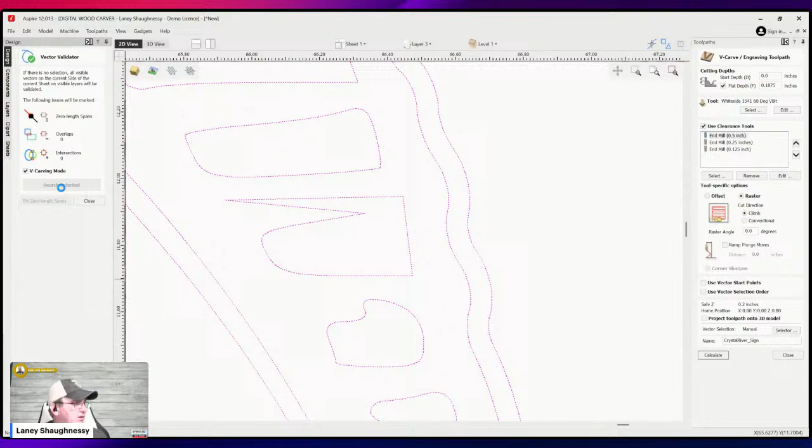If I wanted to validate that one more time, vector validator, we're 10:01. We got to wrap it up. VCarve mode, I got a 0 length span. 0 length span just means that there's 2 nodes that are on top of each other with no line, arc, or curve in between them. So I'm going to fix that by clicking the button that says fix it. All right, so no problems. Now we're going to calculate the toolpath again.

I really think this would look great with a texture in the background, but it's just too much of a... customer didn't want to pay for. All right, preview all the toolpaths. Now you'll see the fish, the red fish, will have the scales carved in and all of that stuff, and the body will be up.

Okay, so now we have the right detail. Again, looks like crap on the little lure, but we'll deal with that. Now we have that nice little defining line, so we can see the rod definition right here, where it kind of goes over the border, and all is right with the world. Okay, so now all the toolpaths are created right here.

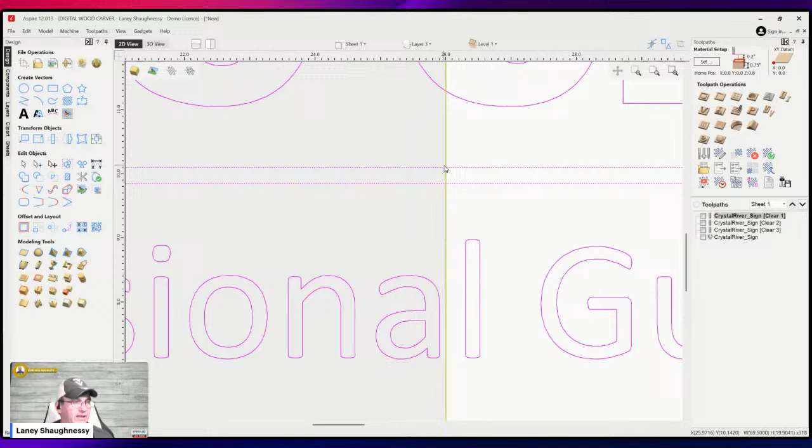Now, tile overlap — this is a margin of error. You're giving yourself a margin of error. Let me zoom in here on this line. If you're worried about your setup, you can give yourself a margin of error — let's say a 16th inch margin of error. What that does, you see this little pink highlight that came up — when it's carving tile 1, it's going to carve into this pink area, over that margin of error.

So when I slide the board down, if I'm slightly off on my mark when I measured and marked the board every 26 inches, when I carve tile 2, it's going to go back into this area here that's already been carved, and it'll help create a seamless carving. It'll still create a seamless carving even if you don't use a margin of error, but literally the tile overlap is a margin of error.

Now, if we were to go to the help menu — and I've got to change my sharing method, give me just a second, let me replace the sharing screen.

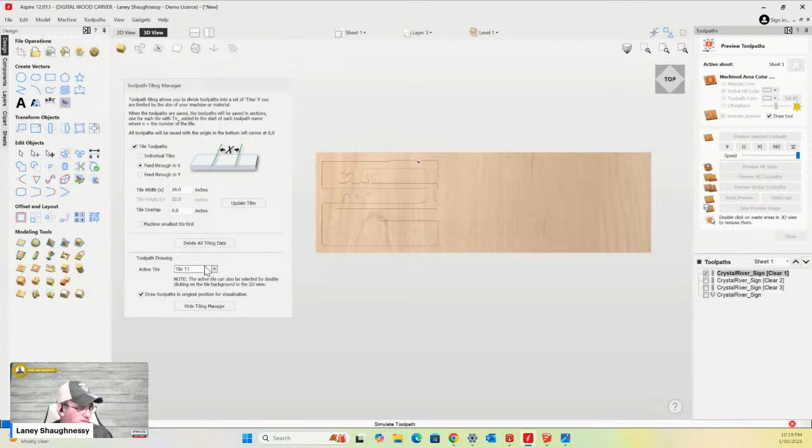And with tile 3 carving... oops, hold on, I switched right back to tile 1. Sorry about that. Let me get tile 2 done here. Tile 2. And tile 3. Okay, so run all again, 1/2 inch, 1/4 inch, 1/8 inch, V bit, all of tile 3.

Now, the great thing about the tiling toolpaths and everything -- let's preview all for that. The great thing about the tile toolpath is when we save the toolpath and give it a generic name, it's going to put all the T1s and T2s and T3s. It's going to label them in that name.

So let's go save the toolpath, and we're going to wrap this up. Here we go, save toolpath. Make sure that we have... I got to go down. I don't have my post-process set up. I just got this computer set up, but not the Vectric software. So give me a minute.

Digital wood carver, helical arcs inch. Okay. Output visible toolpaths to multiple files, group where possible. There's not going to be any groups here because I use a quarter, half inch, quarter, eighth, and V-bit. There's none of them the same, but still, that's my default choices.

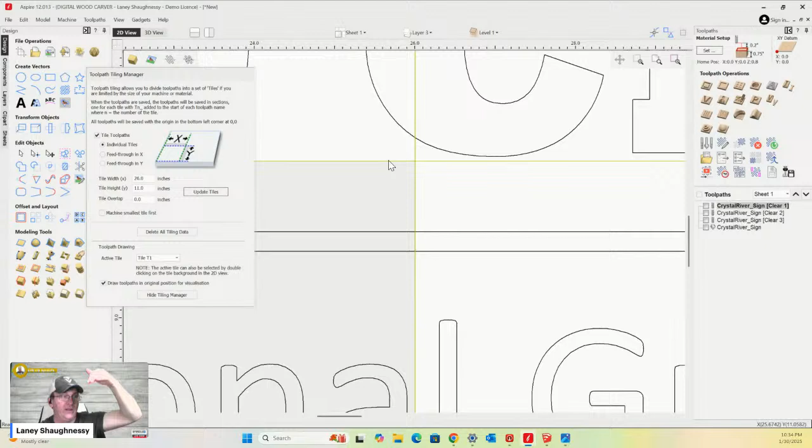What it was explaining in the manual is, if I'm doing individual tiles, when my router bit is cutting tile 1, there's going to be some areas of the design where the bit has to finish its cut. We can't have just half the bit stopping on the line—we've got to get the bit radius. So we need to overlap into tile 2 by at least the radius of the router bit. That's what those instructions were explaining. We've got to get over into that by at least half the bit. So you would set your tile overlap by the radius of the bit.

But when you're feeding your tiles through on the X-axis and cutting in the same direction, the overlap isn't as critical—it's used more as a margin of error to give yourself wiggle room when sliding and resetting your board if you're worried about your setup. So overlap is a margin of error when feeding through X or Y, but it's critical that your bit crosses over a tile by at least half the bit diameter when doing individual tiles. You'd set the tile overlap to at least the radius of your bit as a minimum.

So when we're viewing tiles, like viewing the toolpaths, we can view tile 1 with all its toolpaths, tile 2, and tile 3. But this tile manager has to stay open when you go to save your toolpaths, so it knows to output the tile toolpaths and check those. All right, so that's your tile manager.